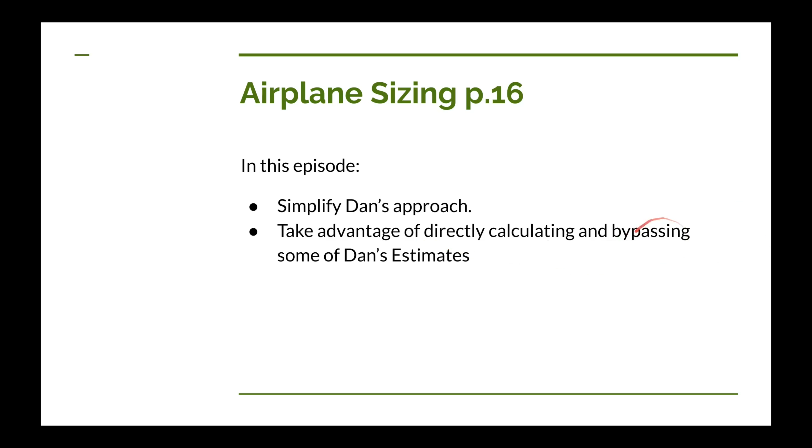And we're going to simplify Dan's approach quite a bit, and we're going to vary one aspect of Dan's approach too. And the way we're going to do this is we're actually going to take advantage of being able to directly calculate some of the weights. And that allows us to bypass some of Dan's estimates and makes things simpler. So this C sub D0 is the coefficient of parasitic drag.

And by the way, if you don't know what some of these aerodynamic terms I'm going to use are, I'll put a playlist up here in the upper right hand corner that you can click on, and somewhere in that playlist you'll probably find a video that covers the aerodynamic term that we're talking about. And I know there's definitely one for the drag.

Now if you don't want to do a range calculation for your airplane, we could actually skip this whole page here. But we would probably want to use it a little bit later in some other calculations in future videos. So let's go ahead and calculate it here, just because Dan includes it in the sizing. Now Dan's equation for estimating, and it's a really rough estimation of the coefficient of parasitic drag, is to estimate the coefficient of friction drag and then multiply that by the ratio of the wetted area to the surface reference area of your airplane. Now this is a ratio. You don't have to know either one of these specifically. We just have to estimate the ratio of these two.

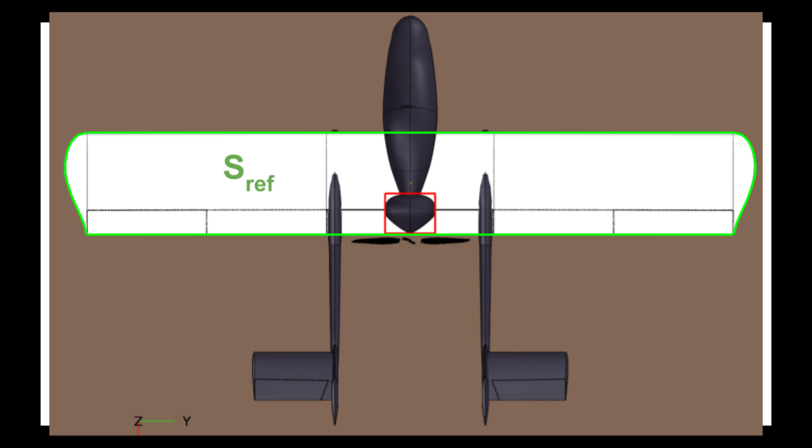Now let's go ahead and talk about what these two numbers are. The wetted area of the airplane is the surface area of the airplane that would be wet if you dumped it in water. So the surface reference is the surface area of your wing as you're looking at it from above. So this is a planform surface area. And it includes the area of the wing that's occupied by nacelles, pylons, and the fuselage. So you don't exclude those areas.

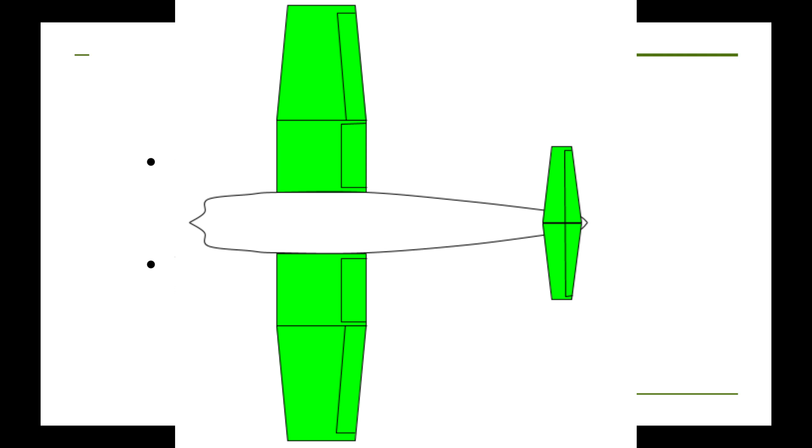Now Dan says we can estimate this ratio based on other airplanes that are similar to the one we're talking about. And he has a great table there. And he separates it by single engine and double engine and by the configuration. Now we're using a conventional configuration, which means we have a big wing up front and a small tail back behind. Now he also talks about other configurations like a canard configuration. But for a conventional configuration with a single engine, this ratio is 3.8.

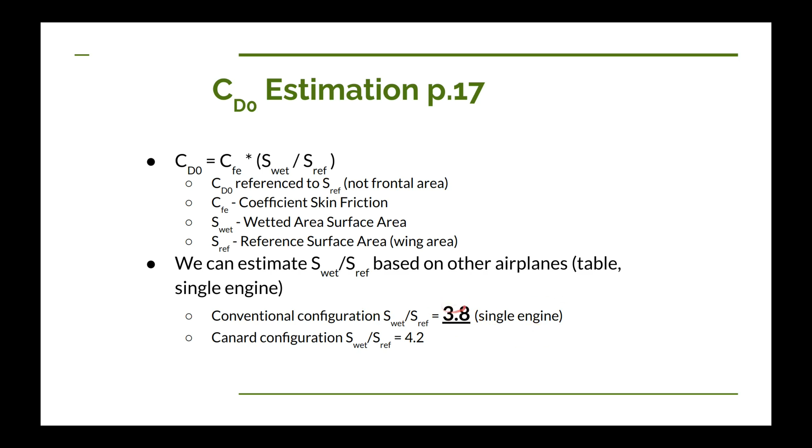And what's nice about this ratio is it's pretty much independent of the overall size of your airplane. The dependency is more on the configuration and the number of engines you have. So it makes this number pretty nice because it'll apply to ultralights as well as large airplanes. Well, now let's talk about the coefficient of friction drag. And again, this is completely independent of the size of the airplane. It's more dependent on how you've constructed the surface of the airplane and some of the aerodynamic choices you've made.

And again, Raymer has a nice table. So he has various values depending on the number of engines and the aerodynamic cleanliness of the airplane. So an average home-built design cleanliness is what we're going for. But we also have clean designs, and by clean, Raymer means very aerodynamically clean. And in another example, he has a clean strut-braced. But for our ultralight, we're going to use 0.009.

Now, it would be nice if we had some more values for ultralights. For example, wire braced would be a nice value, which I'm guessing is going to be a bigger number than 0.009. But our airplane is structurally going to be very similar to a lot of home builds. So this is an appropriate number for this particular design we're working on.

So if we plug our values in, we got the 0.009 for the coefficient of friction drag. We got 3.8 for a ratio of wetted area to reference area. And this is our calculation. So our coefficient of parasitic drag is 0.0342. And we'll use that a little bit later.

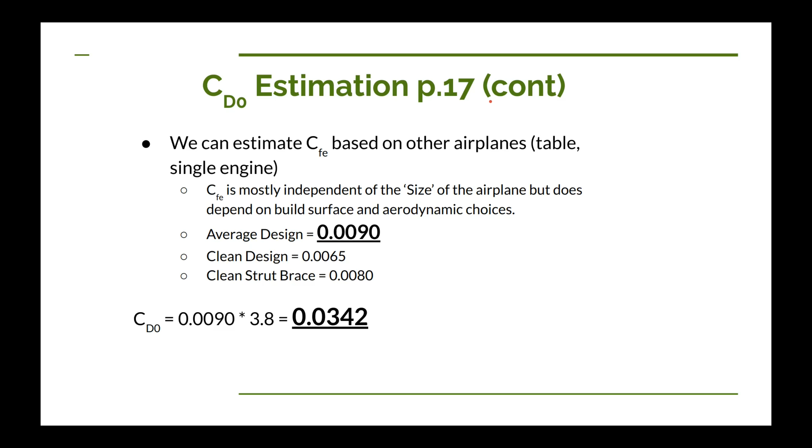Now in the future, after we've designed our wing, maybe we can go through some analysis that shows that it's actually more efficient. So we might be able to get up to 80, and if we're really, really lucky or really, really good, we might be able to get up to 85% efficient. And by the way, a 100% efficient wing would have a 1 here.

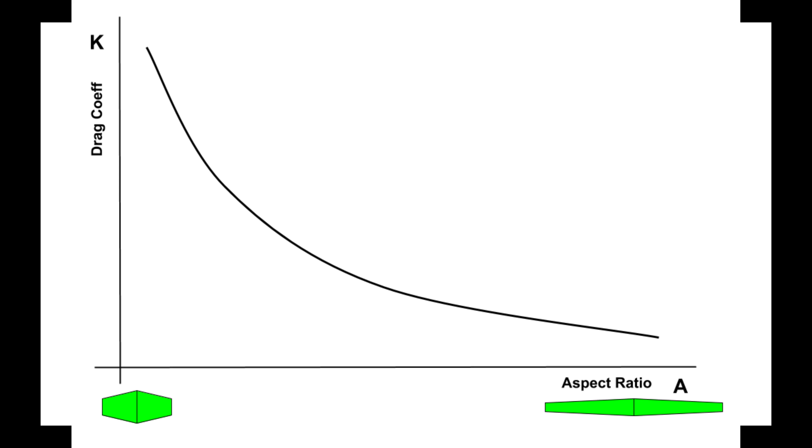So as you can see, this drag value is inversely proportional to your aspect ratio. What that means is, as your aspect ratio increases, your drag decreases. So that means you would like to have a higher aspect ratio in order to reduce drag on your airplane. In order to have a high aspect ratio wing, you usually have to make some other sacrifices somewhere else in order to keep the weight low.

Now what I'm going to do is initially start with an aspect ratio of 4.5. And that's a fairly low aspect ratio. But there's a little bit of an issue with that. The higher your aspect ratio, in general, the heavier your wing is going to be. And that's why you see a majority of ultralight airplanes do not have a high aspect ratio wing.

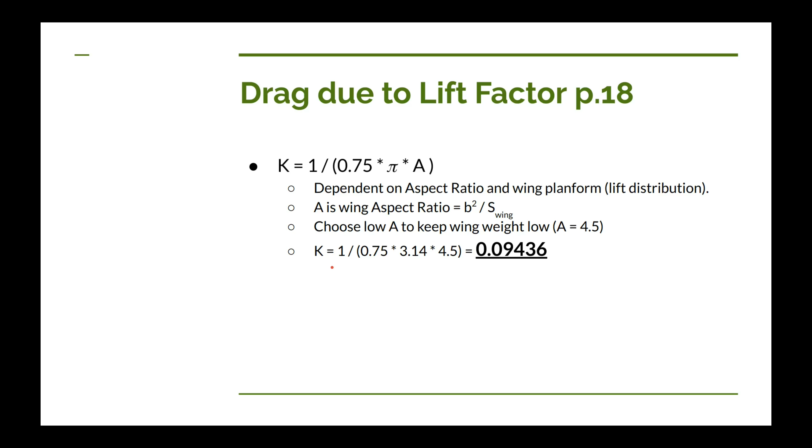Now let's use that K factor, and let's use our parasitic drag coefficient. So the next thing to look at is our lift to drag ratio, and that's on page 18. It basically tells us how far forward our airplane can fly for each unit that we lose in altitude if we're gliding. So the higher the aspect ratio, the farther we can glide. So let's do our calculation. Now this one's one of the more complicated equations that Dan has us do, although there are some really complicated ones a little bit later, but it's going to be a few weeks before we get to that.

So Q is our dynamic pressure. We learned about that in our video on part 1. And in this case, I'm going to do Q for our cruise speed. So our cruise speed is 45 knots, and I'm just kind of pulling that out of thin air. Now I know it has to be lower than 55 knots according to our FAA regulations, and that's when you've got the power firewalled on your airplane. So I'm going to assume cruise is somewhere between 40 to 45, and for this calculation, let's call it 45 knots.

Now this is the coefficient of parasitic drag that we just calculated. This is the wing loading estimation that we came up with in part 1. And this is, again, the same wing loading estimation. Here's the value K, the drag due to lift factor that we just calculated. And again, the same Q we just had over here. Now, Dan has you multiply this wing loading by 0.98. What he's trying to do is account for fuel that you're going to lose as you're climbing up to cruise altitude. This is supposed to be our lift to drag for cruise, so we're going to lose a little bit of weight while we're climbing out, and this 0.98 is supposed to account for that lost weight.

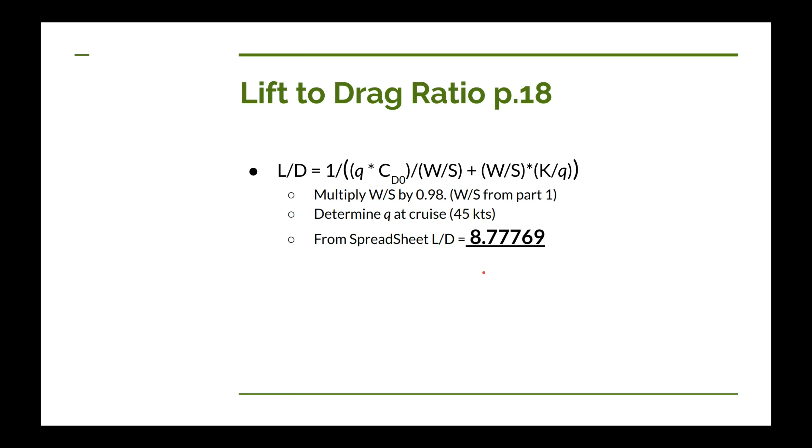Now here's where we can do a simplification of Dan's approach, and that is the percentage of your fuel that is part of your gross weight. Now Dan assumes that you have absolutely no idea what the gross weight of your airplane is going to be and no idea what your fuel weight is going to be for the airplane. And what he wants to do is come up with an estimation of your fuel fraction. But we really don't need to do that.

And the reason for that is we have the FAA regulations, Part 103, and specifically Part 103.1(e)(2). And it says that you cannot have a fuel capacity exceeding 5 US gallons. So you can go right up to and including 5 gallons on your fuel capacity. And we know that fuel weighs 6 pounds per gallon roughly. So the weight of our fuel is going to be 30 pounds at takeoff.

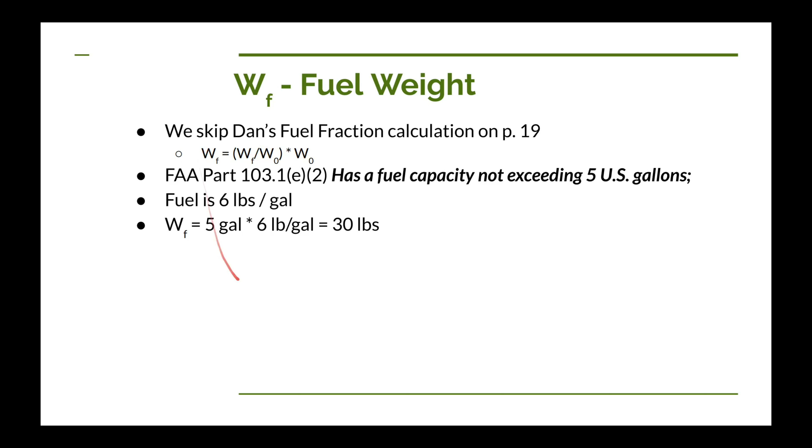So we basically already know how much our fuel is going to weigh because we want to get as much fuel on that airplane as we can to go cruising as long as we can. Dan's calculation is to figure out this fuel fraction, figure out the gross weight, and then multiply the fraction by the gross weight to get the fuel weight. We can short circuit all that and just go with 30 pounds.

Now here's another weight that we can simplify much easier than using Dan's approach, and again, it's because of the FAA regulations. FAA regulations say that the empty weight of our airplane, and we'll talk about what that means in a moment, has to be less than 254 pounds. So you cannot equal it, you have to be less than.

But let's go back and let's talk about what empty weight means. Empty weight means every permanent part of the airplane, in other words, parts that cannot be removed. So for example, you don't include fuel in the empty weight, you don't include the pilot, you don't include baggage, you don't include engine oil, you don't include coolant, things like that. So once you remove all that stuff, that's the empty weight of your airplane.

So what Dan does is he comes up with an empty weight fraction. So that's an estimate on the ratio of the empty weight to the gross weight of the airplane. You don't need to know either one exactly to start with, but he can come up with a ratio for that. And then later, you figure out what the gross weight of your airplane is, and then to figure out the empty weight, you multiply the gross weight by that ratio, and then you get the empty weight. But we don't need to do that.

We got this 254 pound limit, so we know that our empty weight is not going to be more than that. But this 254 pounds does not include things like floats and safety devices. I forget what the value is you get for floats, but there's a maximum value of weight that you can have for floats. And there's a maximum value for safety devices, and that's 24 pounds. So you can have up to 24 pounds more added to this 254 for things like parachutes.

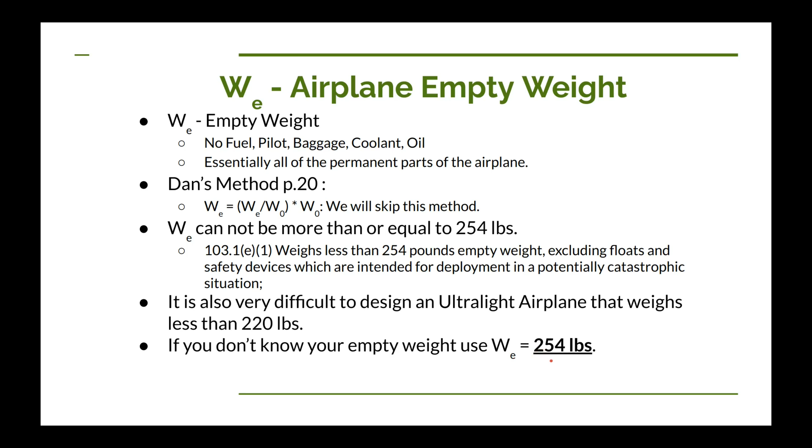Okay, so now we've almost figured out one of the main things that Dan's trying to figure out with all the estimations that he's done up to this point. It's trying to figure out the gross takeoff weight of the airplane. We already know the empty weight. We already know the weight of our fuel. And we've got a few other things to figure out.

For example, the pilot. So I'm designing this airplane for a 200-pound pilot. That's about how much I weigh. If you were a 300-pound pilot, you'd stick 300 pounds in. I'm also going to include a soft pack parachute. That's 18 pounds. Now I could go up to 24 pounds, but I'm only going up to 18 because that's how much the soft pack parachute I looked at weighs. And I'm also going to include 15 pounds for extra stuff.

Now I said back in the goals that I want this to be kind of a touring airplane, or a plane to fly to local friends that have airports so I can go visit with them. So I'm going to take some extra stuff with me. For example, I'm going to take tools, in case I have some things that need to be changed, like changing spark plugs, changing tires, etc. I'm going to take tie downs because it's possible I'll have to stay overnight, so I don't want the airplane to blow away. I'll take a blanket with me just in case I have to sleep in the airplane overnight.

I'll take water and snacks for while I'm flying. I'm going to take maps because I'm actually going to go fairly long distances over territory I may not be familiar with. I'll take a backup GPS and I'll take my cell phone. So I'm going to include all that in baggage, so I'm going to design it to have another 15 pounds. So if I add all that up together, I'm getting 517 pounds. So that's what I'm going to use for my gross takeoff weight.

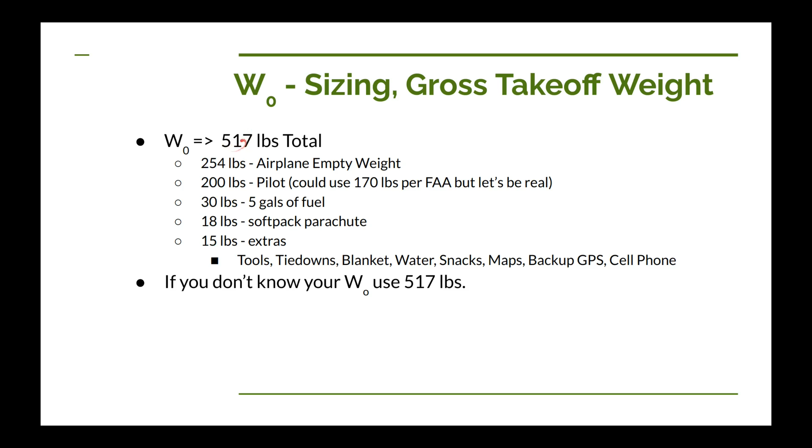One of the estimates that Raymer wants is the fuel fraction. That's the portion of the fuel that's part of the gross weight at takeoff. And here's the equation that he uses, which is kind of a complicated equation. There are a number of things that he wants to know in order to do this estimate. One of them is, how far do you want to fly? In other words, what do you want for the range of your airplane? He also wants to know what the fuel consumption of your motor is going to be, the prop efficiency, and most importantly, the lift to drag ratio.

Well, this doesn't help us a whole lot. We already know what the fuel fraction ratio is for our airplane. But another thing we can do is rearrange this equation, solve it for range, and try to calculate what the range of our ultralight will be. So that's what I've done down here. Here's range in feet. This operation here is called a natural log. And here's going to be our fuel weight divided by our gross weight. This 0.975 is to account for the amount of fuel that you're going to burn while you're climbing.

Now, fuel consumption units up in here are pounds of fuel per second per brake horsepower. Now, Raymer does something a little bit confusing.

He talks about some typical fuel consumptions for modern engines, but he uses slightly different units when he's talking about it. So he's saying that modern engines have from 0.4 to 0.6 pounds per hour, not seconds, per brake horsepower. So you have to be a little bit careful. And once again, fuel consumption, your prop efficiency, and lift to drag. Now let's talk about fuel consumption and your prop efficiency.

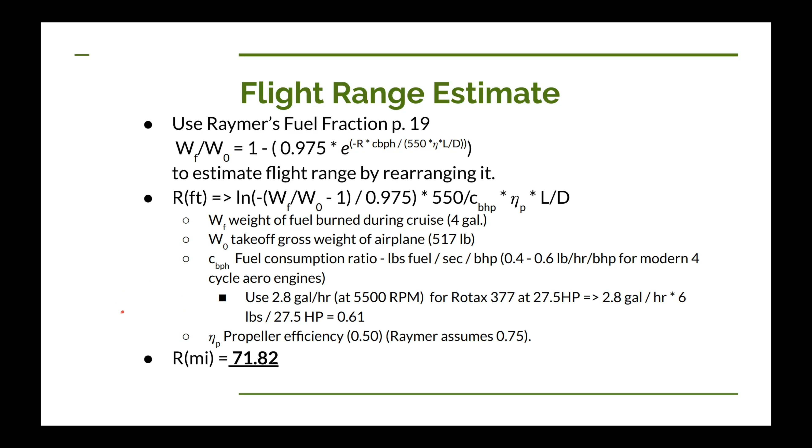So that brings us to the end of Raymer's sizing calculations. So let's review what we've learned. We came up with the coefficient of parasitic drag. We came up with this drag due to lift factor. We came up with lift to drag using those two values. And then we directly calculated the weight of our fuel, our empty weight, and our gross takeoff weight. Well, guys, I hope if you looked at part 2 and you looked here at part 2.1 that you found this to be much simpler and make more sense and not be quite as confusing.

So let's talk about what's in part 3. In part 3, we're going to work on engine sizing. And by sizing, they don't mean like the volume of it. It means the power, like the horsepower of it. And then in relation to that, we're also going to figure out what our prop diameter will be, the number of blades on the prop, and what will be the tip speed of the prop.